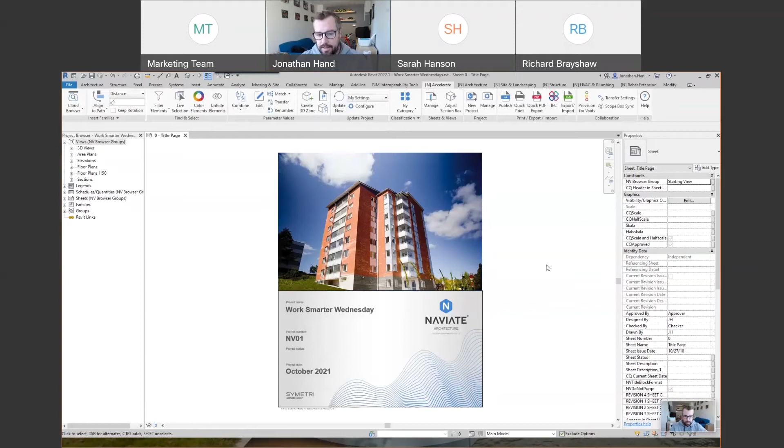Just some of the tools that will be really good for you to start saving time to check, update, and manipulate all that type of data. So you can see that in my Revit, I've already got the BIM Interoperability Tools, and I've got some COBie schedules and data already sitting within my project. So I'm going to sort of flavor everything I want to do around the COBie data, how we manipulate and manage that information.

You'll see on the Accelerate toolset at the top, it's split into different sections in the ribbon, but the one I'm going to focus on quite a lot today is around the parameters and the management of that data in these values. One of the biggest tools that everyone uses day to day when they subscribe to Naviate is the Edit Parameter tool. If I click it, it allows you to manipulate and manage that data, whether it be from a Revit category or from a schedule.

If I look at the category section first, this allows me to pick any category that's visible within the project. So here I can select something to do with the walls, and it will load a dialog box that allows me to choose the parameters I wish to review, modify, or edit. I can look at both instance and types. To show an example, I can click type parameters, select all parameters, select OK, and they will load into this dialog box, like an Excel type matrix.

This gives me flexibility and visibility of what that metadata currently looks like. It works very similar to Excel in that you can jump into a cell and manipulate it. I can select this cell, it will highlight, I can click delete, and select update values, and that writes that parameter change directly back into the Revit family and into the model. I can also double click into it and input data, make a change like that, put in a fire rating, and then click update values.

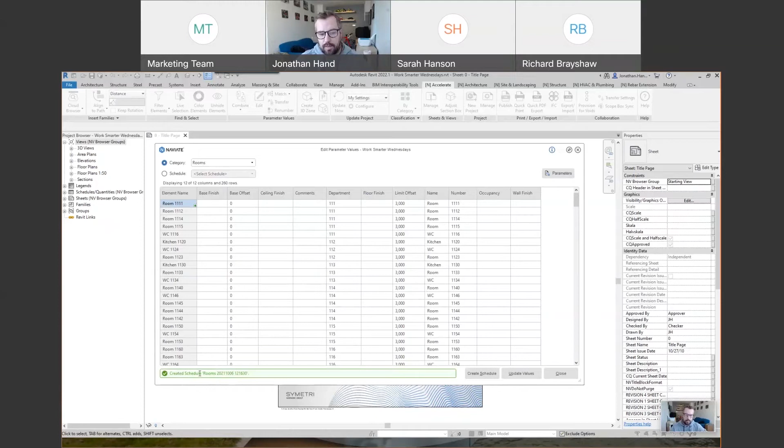Whereas here, I can just load them into the matrix, select OK, and you'll now see that my room schedule has been created. So when I check my project browser, schedules, you'll see under the question mark, there is my new schedule.

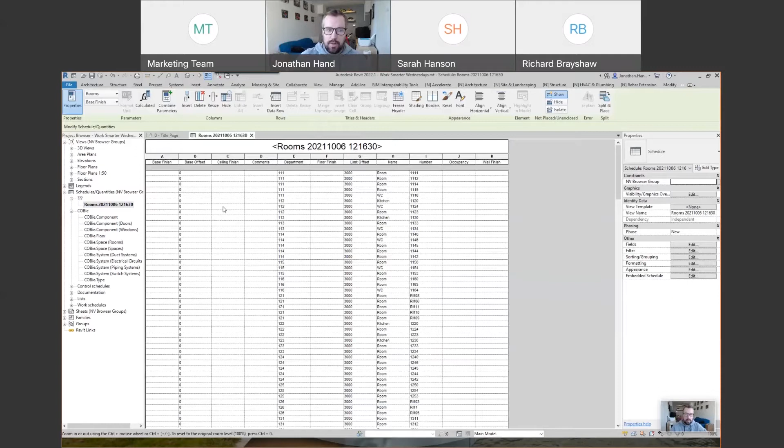So you've got full flexibility whether you're editing the parameters from the categories, editing the schedules, or whether you want to go vice versa and create a schedule from the parameters. Naviate can do all of those things, but that's the simplified version of modifying the parameters.

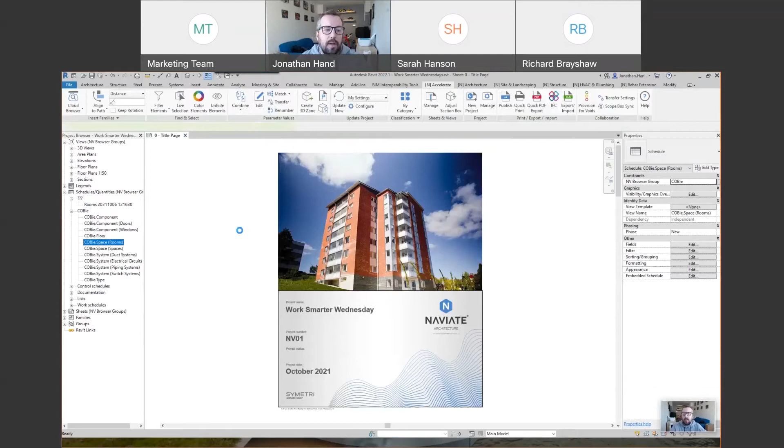What you'll find when you're looking at the COBie stuff is that lots of it will be empty. So if we look at, let's say, the standard room schedule, you will see there are just lots of gaps. So I've got the standard information which has been generated, and you can see there are some of my descriptions that I've put in.

But what I may want to look at is whether there's a way that Naviate could help populate the room tag information. Is there a way that we can take existing content, combine it together to create new parameters, and assign data automatically into these schedules? And the answer to that is yes.

So when we look at the editing button, to the left of that, we've got this feature called Combine. This allows you to take multiple parameters together and combine them, putting them in somewhere else. By clicking the Combine button, it allows me to start picking categories, and I could pick multiple categories if the parameters are common between the two.

To show you an instance of this, if we look at, let's say, the rooms, I can select the room category and then Naviate will load all the applicable parameters, whether instance or type. So if I select the instance, what I can now do is take existing parameters from the room, combine them, and populate them somewhere else automatically in my system.

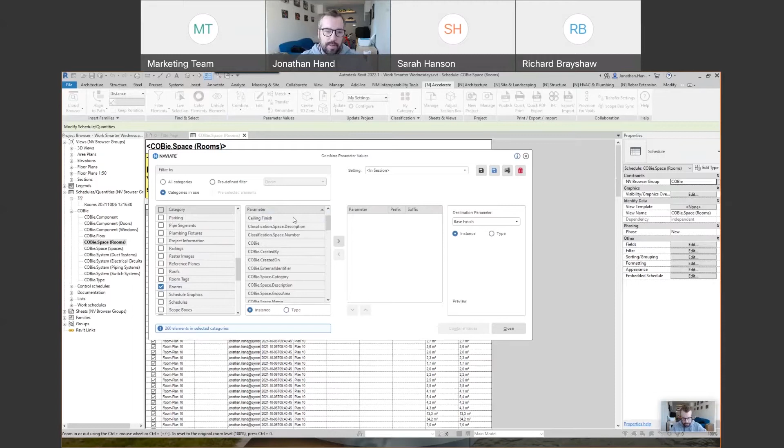So if we want to populate, let's say, the room tag, I may want to take, for instance, the room name. So I could take the room name and populate it in here, and let's say, for instance, I also want to take the level.

So this is now going to build a new parameter called name level. You've got the ability to put suffixes and prefixes in, so we may go with a suffix here, and it goes name dash level.

Then you can control where that information is going to end, so you can see the destination parameter. When we select the drop down, you can then select any of the applicable parameters. So what we want to do is probably put it into the space room tag.

What Naviate will now do is take the data that we've selected, format it as per the preview, and then automatically apply that across the board in the system. The ideal thing to do in Naviate is once you start seeing the save and save as buttons, we can save this into the project so it can always be automatically done.

So here I can go save as. I can just say space. Now I can give that any name. You may have your own naming conventions, but now this is saved in the system, and I could build lots of these things to happen and have them automatically run.

So we could just click the combine value button now, and what this will do is go through my complete project and take that data that I've set. You'll see straight away behind in the schedule, 260 elements have now been updated, combined automatically. So we can have that just run and it will combine that information.

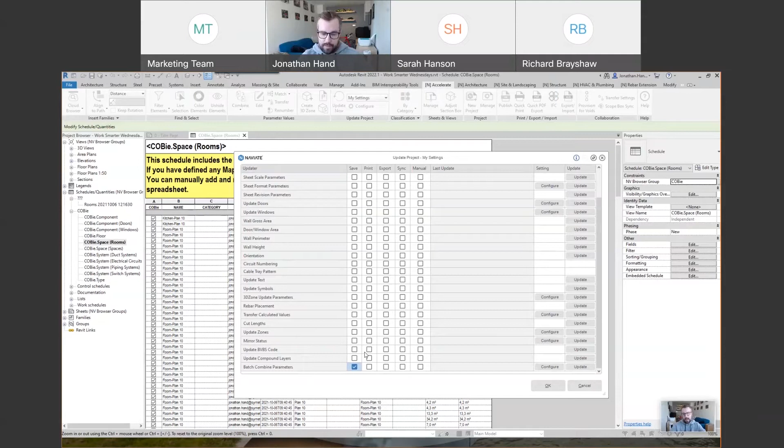If we scroll down, you will see we've got a batch combine. If we select this under saving, that means every time we save our project, Naviate will look at the combined routines and automate the population of that data.

So we can click OK. Now I can click save. Because we've set that routine to automatically run, it can just go off, save the project, and it will also then start to populate that batching combiner.

So in conjunction with the edit parameter tool, where we've got the ability to edit and manipulate data, then with the combine tool, we can move and shift data around the project. Then with batching, we can fully automate manipulation of moving that data however you like. So there are a couple of other tools in here that may be useful.

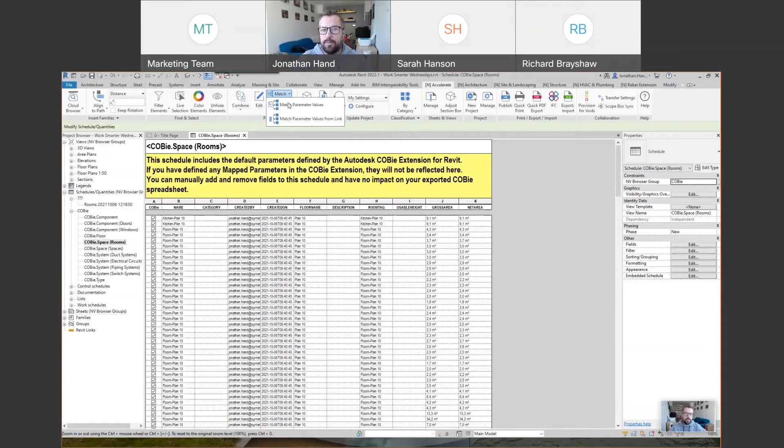We've got a match button, which allows you to match a parameter value. This can be quite useful just looking at existing data within your project, when you want to look at what something has within a particular family. So here we could select this particular window and have a look at its metadata.

We could add something a little bit strange into it, so we could go into its type and just put some information, like Naviate. What the match tool will do is allow me to lift that metadata from that family and apply it somewhere else within the project.

The matching tool also works on linked objects. So we can go to Accelerate and select the match. You can match it from an existing family, or match it from a value within a link. Here we may want to match the comments, the description, from that particular family, so we take the comments of the window.

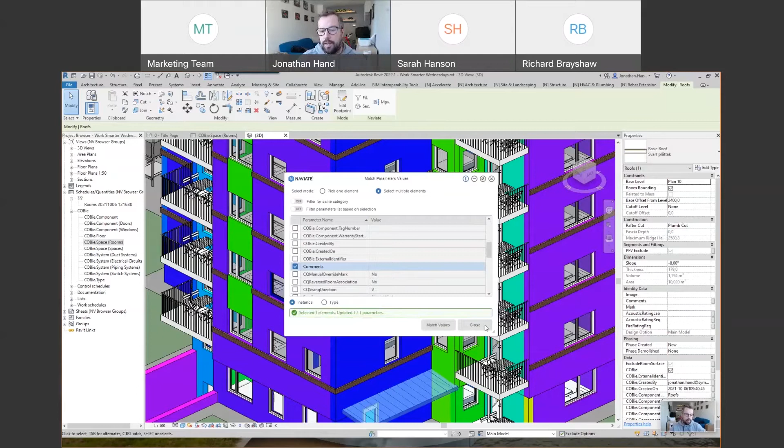I can click back into my model and select this roof. Click back in here and you can see now we can match the comments from the window, making that parameter value appear within the roof value. So now when we click into the roof, you will see we can match the comments across. It's just another advanced workflow you may be interested in.

That's how we can modify and edit the parameters. But you need to know where to look at times to see whether the data is inconsistent and where it's not correct. You may also want to start looking for some visual checks within your project, to see if the data from your supply chain gives this model the correct metadata. How are you finding it? How are you checking it?

This is where I use our color elements tool, as a consistency check. I can really quickly see, looking at a model or a view, whether the metadata is correct. Is there any values that are not quite right, or non-compliant, or values that are just empty, where they've missed that data and it doesn't exist?

The color element tool is designed to apply a graphic override to the view. Here you can see I've got a view with no color override, just the standard out of the box Revit color scheme. But Naviate allows you to select a wall category and then apply a color override to the view based upon the parameter you want to check.

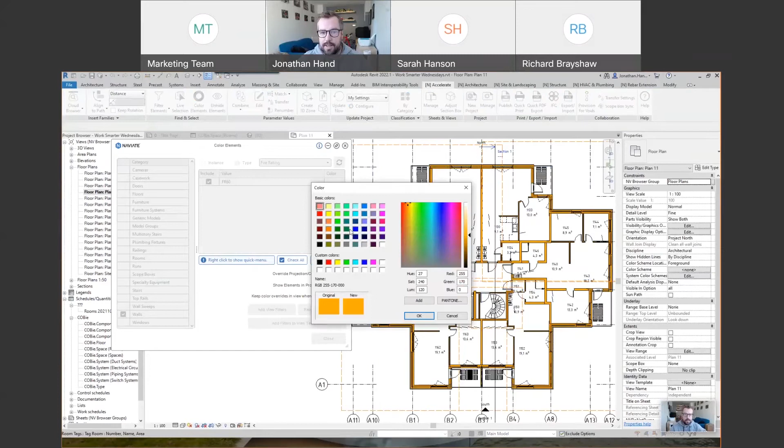This is nicely done if we were checking a fire rating, for instance. I can go to the type parameters, scroll down, and find fire rating, and it will quickly colorize all the walls based upon that fire rating. You can see it's telling me all the walls have a fire rating of 60, so it's colored them orange. Within this color scheme I can click the tile and give it a different color, select OK, and it will update and graphically override that view to suit it.

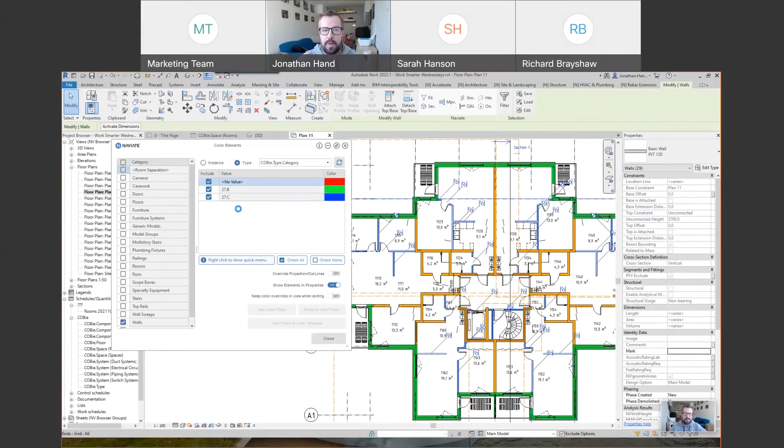When we click apply, we've physically made a change by just selecting it from the list. Now when I click refresh, you'll see that the color scheme has changed because there's a value I'm looking for within that type category within the COBie data which is non-compliant. Automatically, when the value is non-compliant, it goes red.

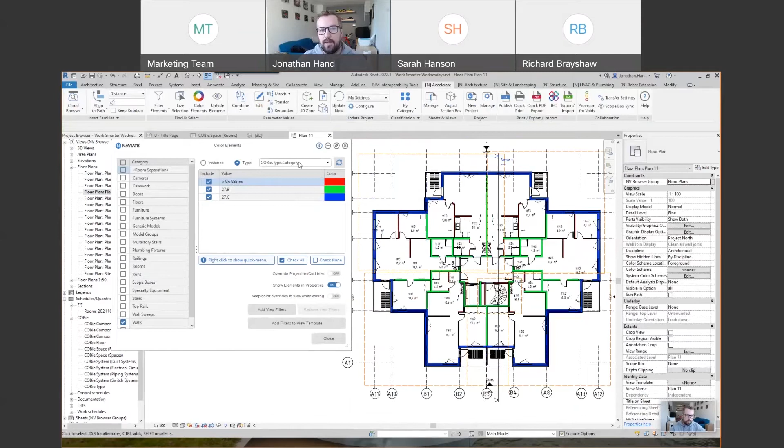So you can easily come in here and just look at a particular category, then look at the particular parameter, and Naviate will graphically override that to show you really quickly where there's inconsistent data. That's what we need to go back to our supply chain with to say there's nothing in here, you need to fix it. The color element just provides a really quick, easy interface to see within any view what may be non-compliant.

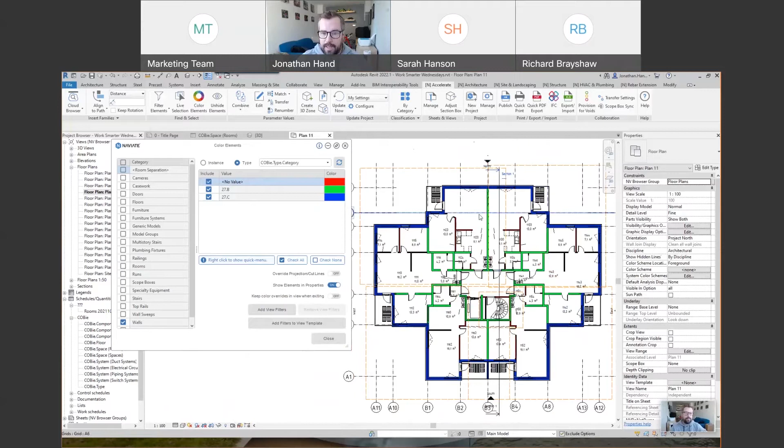It also works within 3D views. So if we click into this view, we can look at the color element tool again, and you'll see in this view there are some mad colors being used. That's because there's already a view filter in use, so I can just click remove.

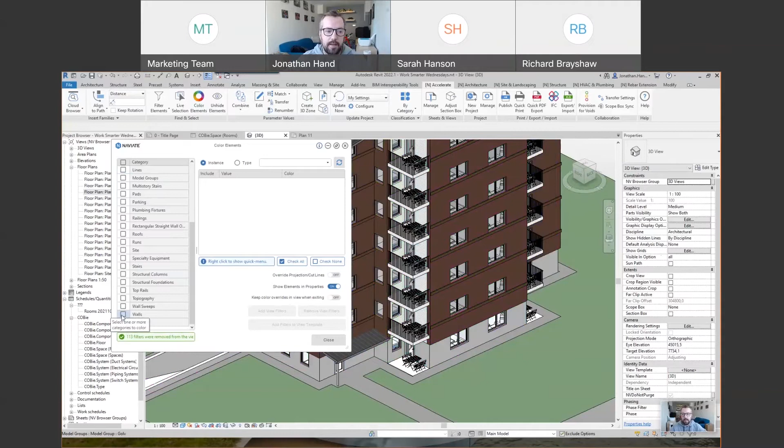We can go back to the standard view, and again I can click in, select the wall category, then choose a type parameter, look at some of the COBie parameters sitting in there, and it will build a color scheme reflective to suit my particular parameter.

So we can scroll down our list of parameters. We can look at, say, the area parameter - you can see everything's got a no value, so everything is going to appear red. What we really want to look for is something with different values. There's nothing in finish.

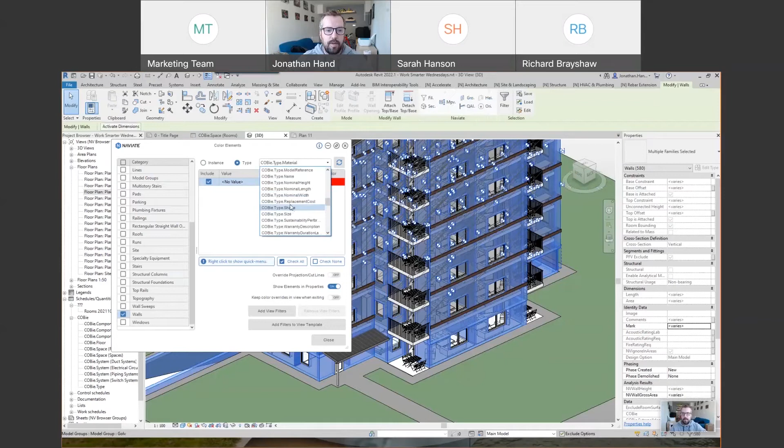Name - you can see it's populating a color scheme based upon all the different names of the walls. Now you may not want to do that, but it sometimes just provides a really good visual check to see what you're doing.

And then what you can do when you're building this - at the minute it's a color override, so we may want to go in and build a view filter. For those of you building view filters in Revit, it's not particularly hard to do - it probably takes one or two minutes to build one. Selecting this button, I can just create them in a matter of seconds.

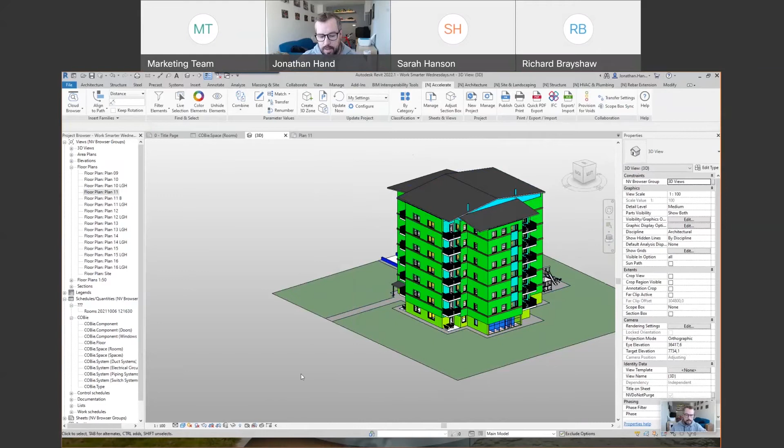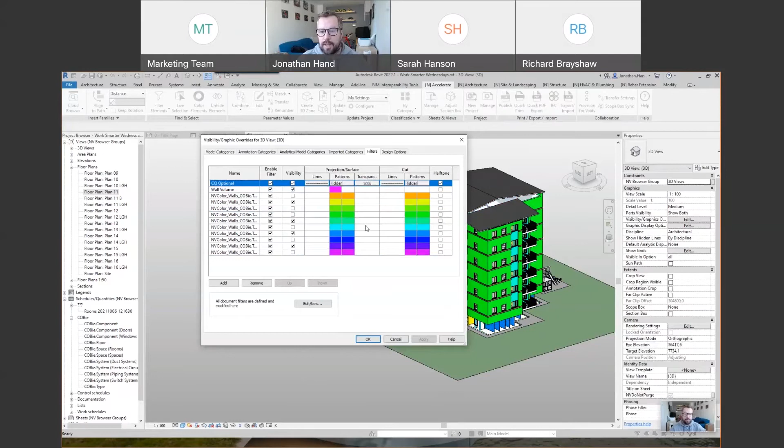Selecting close, then selecting visibility graphics, you'll see under the filters I've just built this new filter within my view. The new Revit functionality from the last couple of years means I can turn on and off visibility based on certain filters. Select apply - you can turn off this green wall, and you'll see we start to hide most of our product, but we're not hiding it off, it's just based on the filter.

So it's a really nice way to go through, find any inconsistent data just to check it, and a very quick visual graphic view to show you what's working and what's not working from the models that you're getting in.

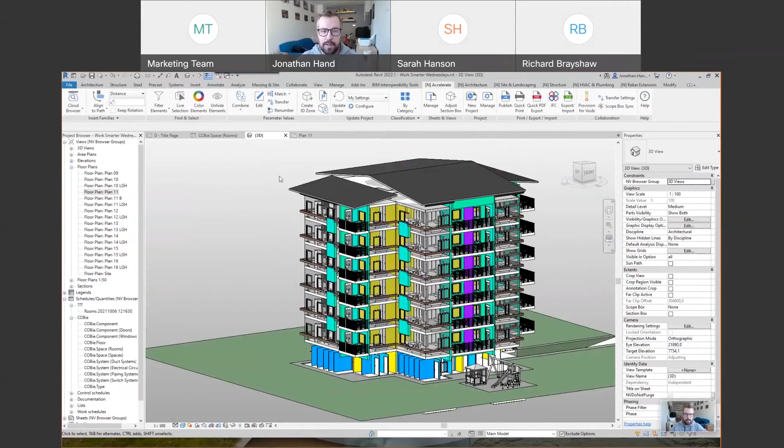You will also start to look at, when you get these models in from your supply chain, you may need to clean them up to federate them. You need to strip out some of the stuff they're doing, or maybe they're having to do this as well, just having an ability to strip out and clean up that project.

And we've got tools for that as well. You'll see under our project drop down, we've got a manage button. We've got a range of tools in here just to allow you to manage that project. The one I use nearly weekly is my project cleanup tool.

So if I need to supply a model, I need to strip it out - I don't want people seeing certain information with the views, the sheets, and all the other stuff that's not always required when you're federating or supplying this model out to other stakeholders. That's where we can use project cleanup.

Now when I click it, it will prompt me to save the project because I can make catastrophic changes to this project by stripping out and cleaning it all up. So I'm going to save it first - I've got my standard view, so I'm just going to save it.

You'll remember that because I'm saving, it's also going to do that batch combine update and update the parameter values in case there's been a change since my last save. So it will just slowly go through, quickly save the project, and then we can run the project cleanup tool.

So now when I select project cleanup, we get a series of radio buttons that allow us to toggle on and off the things we want to strip out of the file. Starting at the top, we get an option to save as, which is probably a really good thing to do. If you don't have this ticked on, it will strip out the current project. So I want to save as a copy, and I then want to specify a folder. I'm going right to my desktop, and I've got a new model called Naviate Clean.

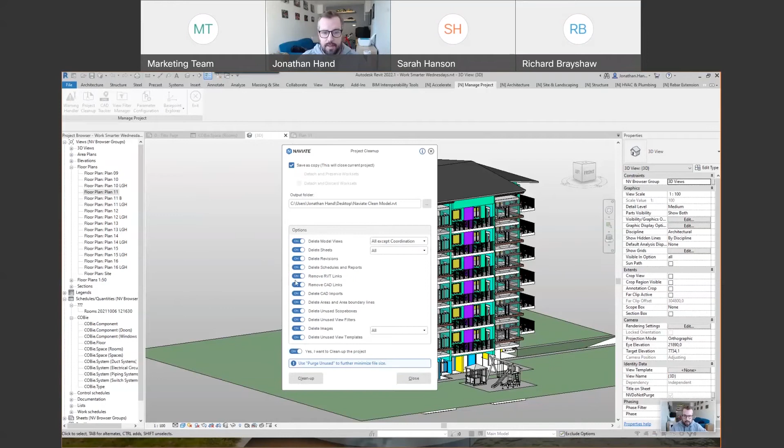Then you can go, okay, yes, I want to clean up. If you were to do this on its own, it might take you 45 minutes to an hour just to go through and look at that. But with Naviate, you simply go in, click Save As, select your options, and then select Cleanup, and it will just go off and automate that process. It will probably take about 30 seconds, just going through and stripping out all the options.

Now I'm taking everything out of my file, but you could go through and just do whatever you need. You can see it's now doing Save As, then stripping the file, and it's going to pop that Naviate, or that Revit project, out into that folder. So again, a nice way to look at that possibility of stripping the model out, because it's quite a time-consuming process. You may be getting a model in from your supply chain with everything in it, and you just want to work on a subset, a simplified model. This is the tool to run - you can see now, within about 30 seconds, that's saved and stripped off.

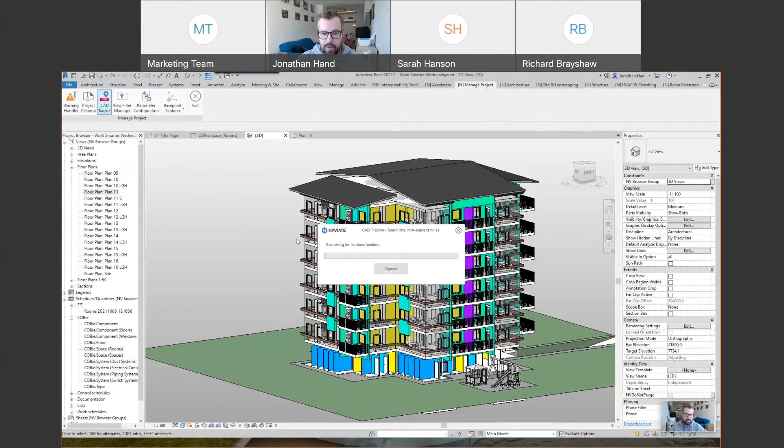There are other things in here where you can track the CAD files. If you're getting stuff through and just want to take out some of the CAD files, this lists where the DWG files may be, and you can simply turn them on and off within the views. If they're off and not in use, you can click delete and strip out that CAD file.

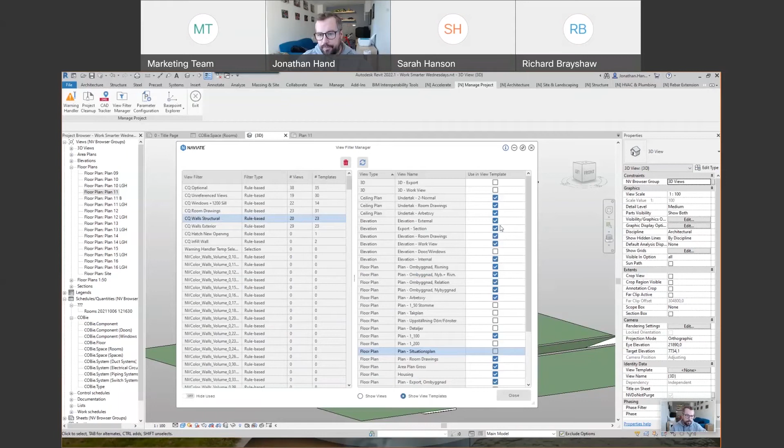There are other things for when you get a project through with millions of view filters applied to different views and you don't know whether stuff's visible or not. This view filter manager is a really simple way, based upon a simple matrix, to select the view filter name and it will tell you in which views that filter is in use. You'll see this wall structural filter is in use in 28 views and 23 templates, so I can just tick it off - that removes that view filter from use within that view, and it updates the list. You can tick it off your elevations too. It's a really simple way to scroll down your list, see where everything is in use, and you can switch it into view templates and tick it on and off. So there are some nice little things in there just to manage that project.

And then when we move it on, you've got the project, and you may need to start looking at whether there's a way to export the project out.

Do you need to create different file types from it? Do you need to go to Excel? Do you need to print it just as a PDF? We've got a range of tools under our print, export and import panel.

You'll see we've got a publish tool. Just to run you through some of the quick features of this, it's a tool which can automate publish routines, so you can set these up either yourself or within projects just to automate what you may need to print or export.

So we have the ability to go to print, whether that's physical paper or PDF, and you can create a configuration for printing. We can also export the project out to DWGs, IFCs, NWC, and we've also got the ability to go direct to PDF. Just to show you some of the functionality, if we look at the printing setup, we can click the cog.

This will then show me the configuration of how I can set up and export certain views and sheets out in my project. Here I can select a printer, whatever printer you may be using, whether you're going to PDF or not, and then choose what you want to print - all the sheets or views, a sheet set, sheet list, or whether you're driving it by a parameter. So here I could go with a sheet set.

I can export that out to a folder and combine this, so I'm going to print a series of plans out into separate files. You can also use the standard Revit naming convention, but you can also build in your own naming convention, which if you've got the parameters, you can align that to 19650 if you wish.

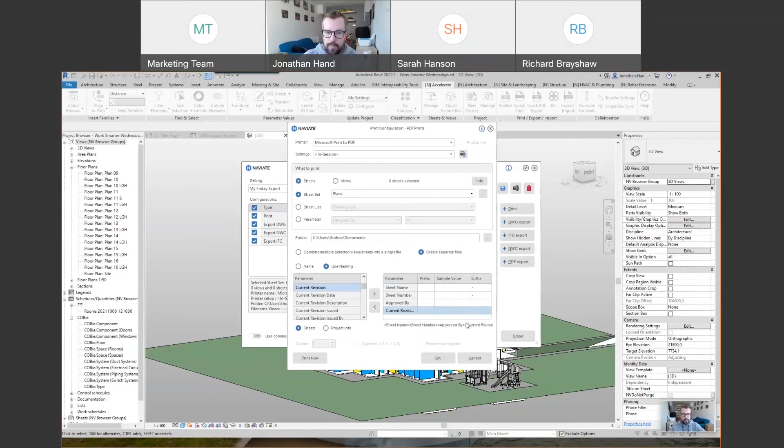It's just a matter of clicking the parameters, similar to what we looked at with the batch parameter routine. You select your parameters, build suffixes and prefixes into it, and you get a preview down the bottom. You build it the way you want the system to print, click OK, and it's saved here. Then you activate that when you publish, selecting the publish button. If the configurations are ticked on, Naviate will automatically go off and do all that publishing.

On the DWG side of things, if you wish to go out to DWGs, you can click sheet set again with a folder location and naming convention, and it takes the standard configuration settings from the Revit exporter out. So if you are aligning to the ISO standard, that will just align with that.

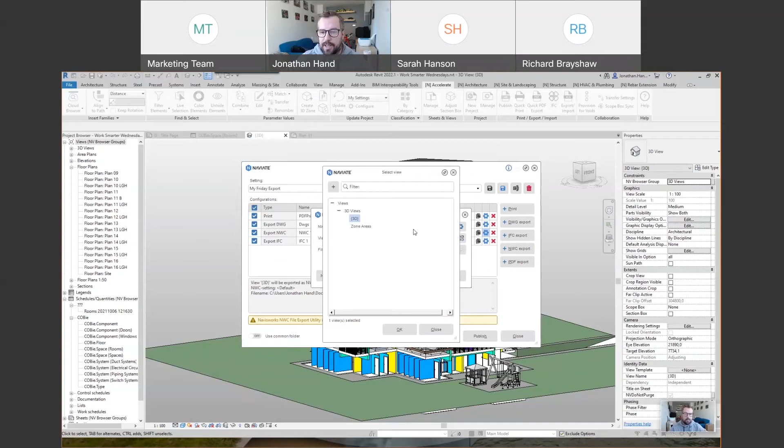We have the ability to do an NWC, so should you wish to create the export out to Navis, you can come in, select your views, click the zone areas, again specifying it to a location and to the Navisworks settings as well. You can configure that, clicking OK, and you're just building up these different configurations to sit within the project file, and when different stakeholders come in, you can just run them off.

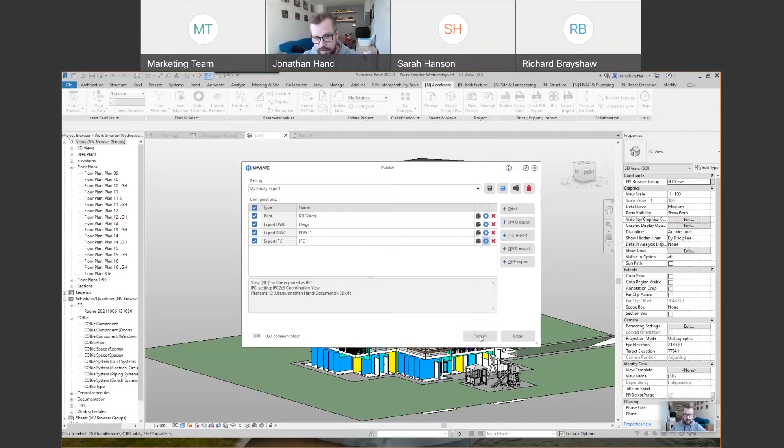It's the same with IFC, again building upon the standard Revit exports. You can select your view, select a location, and then simply click publish. What Naviate will do is go through each of these routines and do it all in one go, rather than doing 10 different PDF exports via Revit, then exporting to DWG, Navisworks, and IFC separately. This configuration can then be saved as a batch on my Friday export. I can come in, click publish, and it goes off and does everything out to your different configurations, and there's no limit to the amount of configurations you have.

Another nice thing is our quick print feature. Within Revit, you can only print one size sheet each time. So if we look at my plans, I've got various different plans, but selecting, say, 3 or 4 different plan sheets in the browser and selecting quick print allows me to fire them out to PDF automatically. The beauty of Naviate is it's got this little tick box, so it will actually lift the paper size from the title block definition. So if that's an A1, A2, or A3, it doesn't matter - it just does it all in one go.

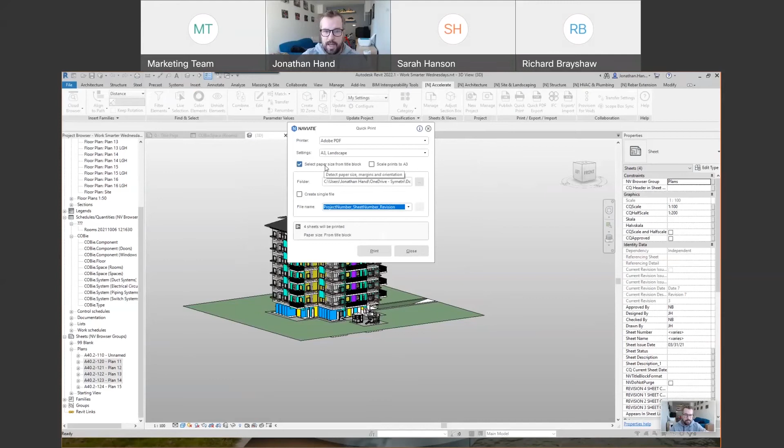Again, you specify it out to a folder, or you can create them as a single file, again with naming conventions should you wish. So if we want to do something like that, or you can use your own, where you can go in and build that naming parameter. You can see 4 sheets will be printed based on the title block sizes, just that extra time-saving piece to get that information.

You'll notice we've got some tools just looking at the IFC side of things. When we select the IFC button, it gives us a subset of extra tools that are in here. I'm not going to show you every one because it will take a bit more time, but if you do want to see more on IFC, just give myself or Richard a shout, we can do some one-to-one sessions on this. I want to take you to this tool — my favorite IFC tool within Naviate — the ability to start assigning that class by family.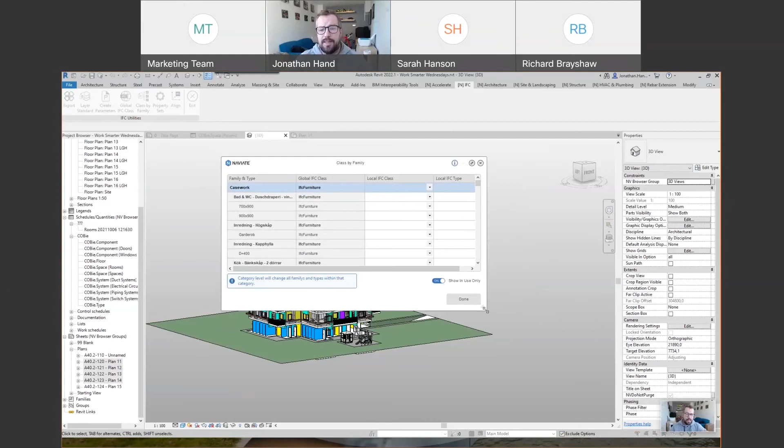When we select the tool, it loads a little dialog box. As a standard, Revit has classified everything based upon a global class. So when it's a piece of furniture, it tells it this is furniture, but we don't have any local classes or local types. What we can do in here, when we take the standard IFC for a slab or floor within Revit, it tends to just come out as floors — you don't really have any definition for its class or type.

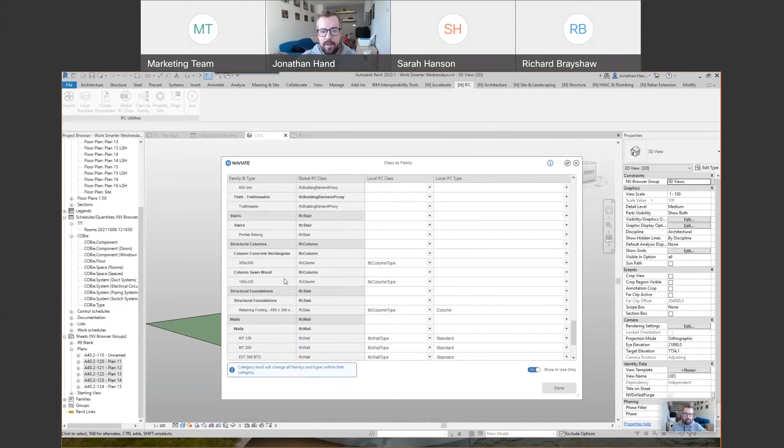But if we scroll down, we can find the different categories. If we look at some of the foundations, you can see I've got a retaining footing. So I can select the local class, select the drop down — now it's reading them class types. Here I could go and assign this to, let's say, the slab type. You'll see it will then assign that local class to the type in here, and we can drill down further and assign that data in again. So we know the local class is a slab, then what is the local type? Here we can define that extra level of information — this is going to be, for instance, a base slab.

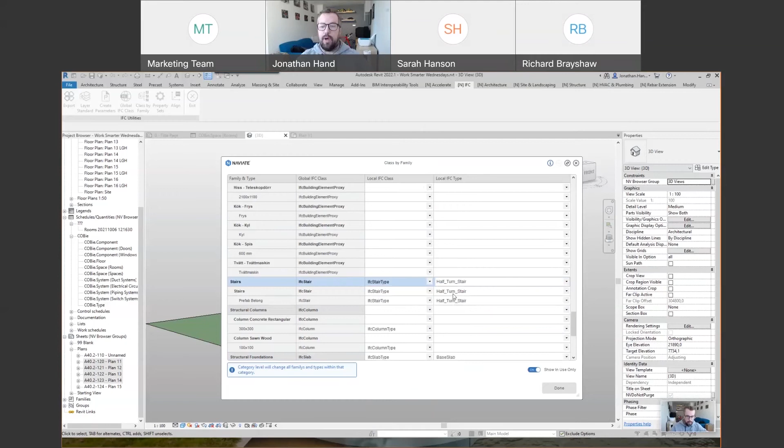You get the principle that you can assign the local class and then the local type, all based upon drop down. So if you find, let's say, the stairs, you can select well this is a stair type, select the drop down, and then define that further level of information. I'm not familiar with what the stair type is, so I'm going to say it's a half turn, and you can then select done to define that.

So when you go to export it, that information is embedded for the class and then each of the local types. I really do like that — a really quick way to go in and set it based upon what the family types are. It's a really nice feature in there.

The next tool I want to show you — although I've shown you how to edit parameters within Naviate — we can also fire everything out into Excel. Here we can just go to import export, and we can choose to export our schedules out. For instance, if we look at the COBie space, which is the one I've edited, I can export that out to Excel, just go export, and it will fire it straight out to an Excel file.

I select save, and it will launch Excel and show me that data directly fired out into Excel. You can see it's just taking a matter of seconds — there you have that information then fired directly out to Excel. But if we run it again, you can start to take everything out, so I could take every schedule here, select at the top level, and Naviate will go out and write this into one Excel file.

But we can also use the ability for re-import.

This is the really clever bit, that we can fire it out into Excel, make changes in Excel, and then import that back into Revit to update that parameter value.

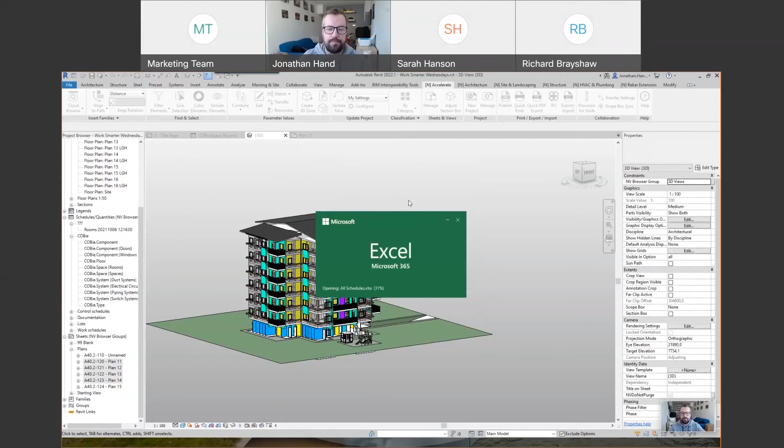Here we go. Because we're using this re-import method, as I said, you can go in and manipulate any of this data. So if we look at the component door schedule, under the description, we put Naviate in here and drag this down through all the cells. We drop that in there, making sure we don't miss any - we've put Naviate under the component description.

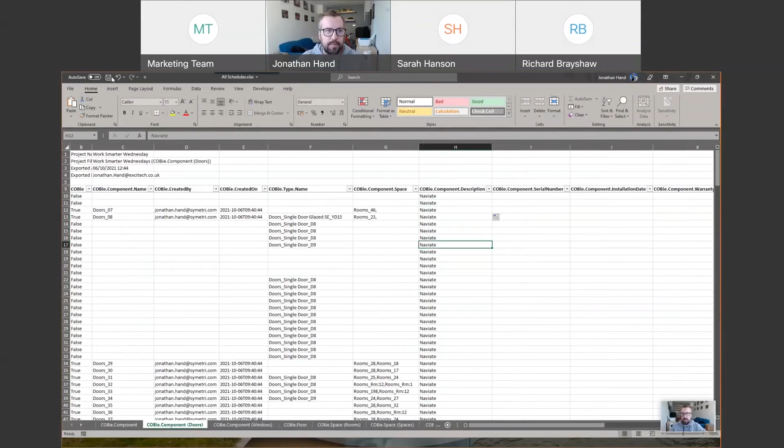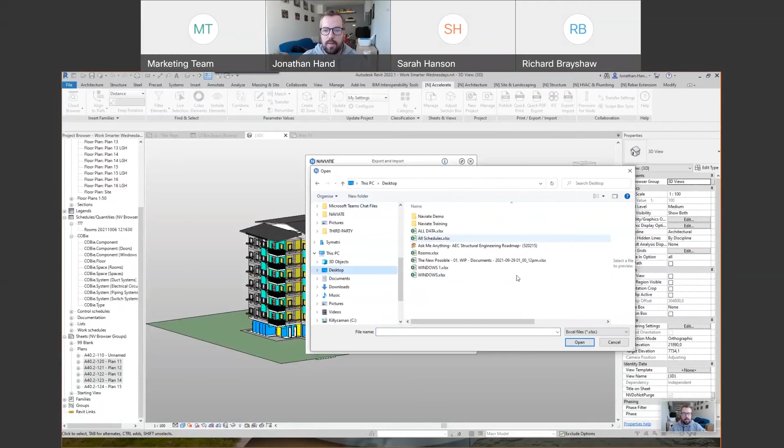We click save, we can close, and when we go to export import, we can then go through and look at that information. We can import it all, or select import and pick the file. We go to our desktop, click all schedules, then we can import it all again, or just pick the doors. We go import, and it will do a quick check to see what information is different between the two - it's resulted in no errors.

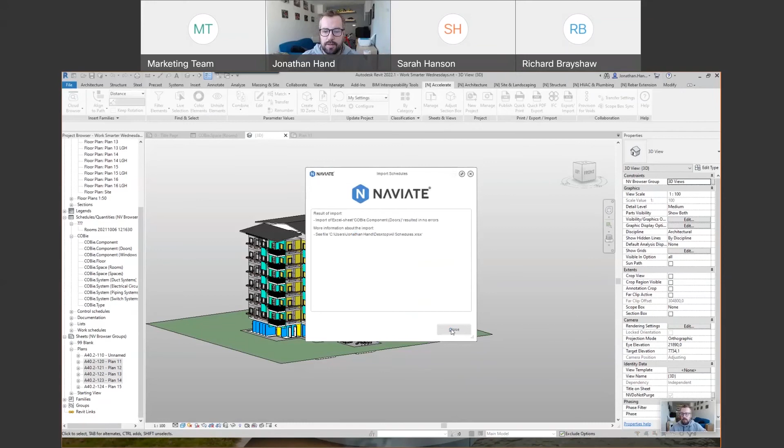We can then close, go in group, and then go look at that component door schedule, and it should have - provided I've selected the right schedule, I think I have - you can see there under the description, we now have Naviate populated.

So you've got both workflows. You can do it within Naviate to find the data, manipulate it, edit it, should you wish. Or fire it out into Excel, use the option to re-import, manipulate, change, edit the data there, and you can see it comes right back straight into my Revit environment.

So coming towards the end, the last point we wanted to cover is Builders Works openings. This is looking at what we call in the Naviate world a provision for a void - the ability to look at joining disciplines together. So let's take architectural and mechanical, with pipes and ducting going through walls. Can we provision that to have a system where we recognize where these clashes are happening, and get the architect to automatically put the openings in line with where I want them from a mechanical perspective?

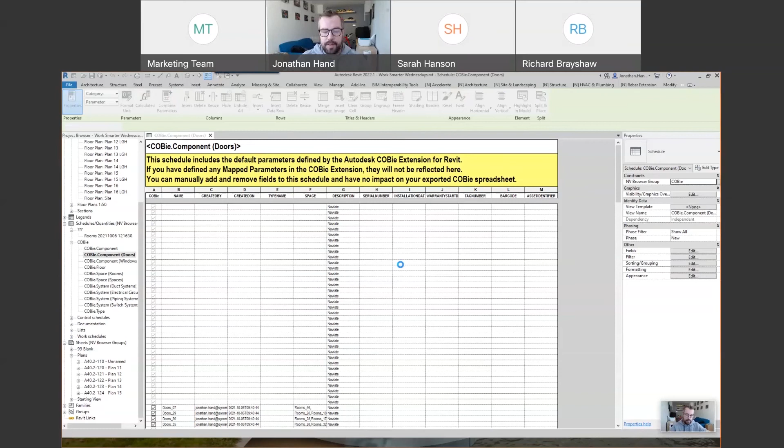I'm just going to open up a different model for this because I've got two different disciplines together, and I can show you very quickly the principle of what the Naviate system will do. So if we look at this MEP model, this is a piping model with some ducting and pipes. What we can do as the MEP contractor is build a provision in to mark an area.

There's a pipe going through a wall. This is the void or the opening that's needed. We can send that back to the architect and say, look, this is where you need to do all these things. Then you need to actually put your openings in the wall.

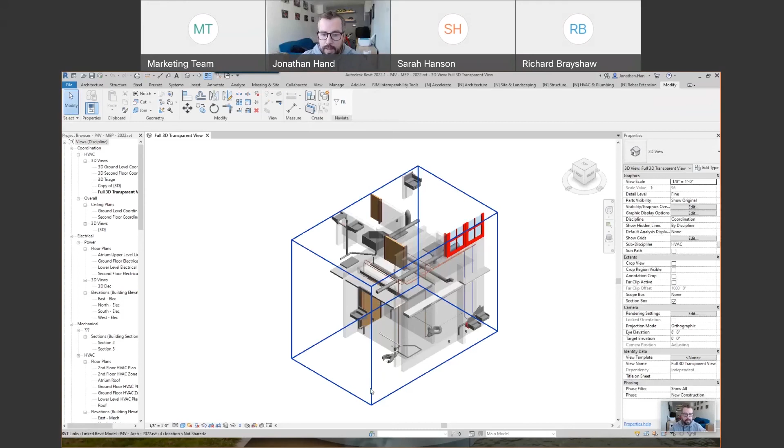Under the Accelerate tool set, we've got this provision for voids button. Now, this is quite a large tool set. As you can see, it goes into its own contextual ribbon, and you've got lots of different options. I'm not going to explain everything on this call, but I'm just going to run through the process.

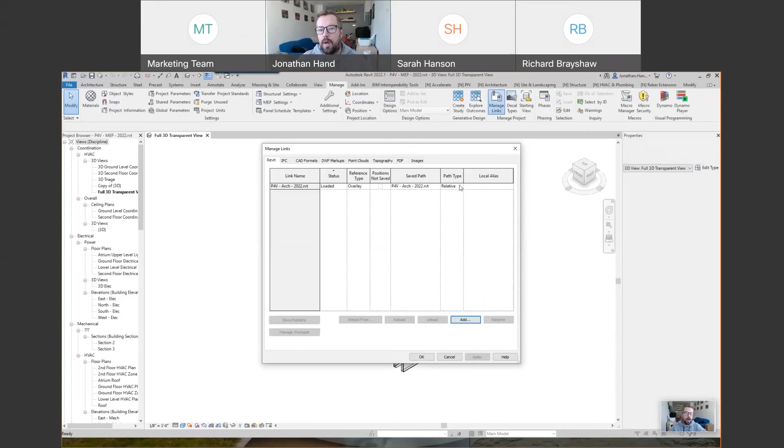What we want to do is, in this model, I've got the architectural model linked in. So I've got this from my architect, and I'm the mechanical services engineer, and I want to look at provisioning around these walls, what needs to happen.

So here I can go to provision for voids. I can set the architectural model as the target project. I can specify which discipline I want to provision. In this case, I'm going to look for both structural and architectural, but I could just limit it just to the architectural elements. But I can click both.

Grouping is just a parameter that we group the voids by, so I'm not going to spend much time on that, but we can look at what we're targeting. From a mechanical perspective, I want to look at everything going through all the architectural elements, so walls, floors, ceilings, roofs. And then the target, am I going to check it against my pipes, my ducting, my conduit, my cables? So very simply, I'm taking the architectural model, checking everything, looking for pipe intersections.

Here I've got a void system where I can look at intersecting, which is a physical intersection through a wall, let's say, or a proximity warning to look at a particular distance from an element. But let's go with an intersecting. I can simply click create. It will go through and do an analysis of the two linked files, and then it will create a provision for where a void potentially needs to be.

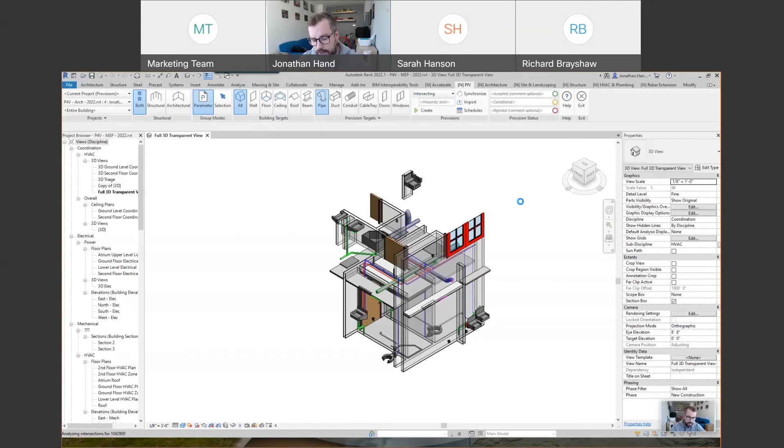Then me as the building services engineer can go through and look at each of these voids and decide whether they're applicable. And that's the bit that we can send back to the architect to say, we've put a void in this place. Are you sure that you need it to be?

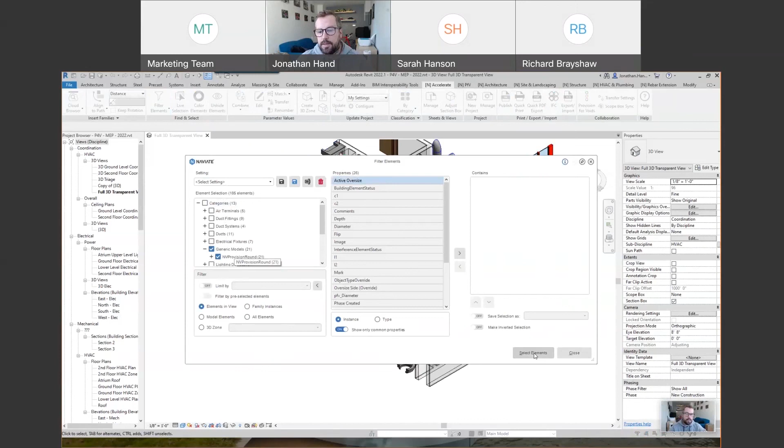So what Naviate has done is, if we look at Accelerate and we just filter that element, it creates what we call a generic model element. You will see it's created 21 of them, these provisions. And when we go in and look at them, you will see that we've got them through particular areas.

So if we zoom in here, you will see that we've got a pipe going through the wall. If we just go in and select this, this is the provision that Naviate has put in. It's just put a little generic model element that's found where the pipe goes through the wall.

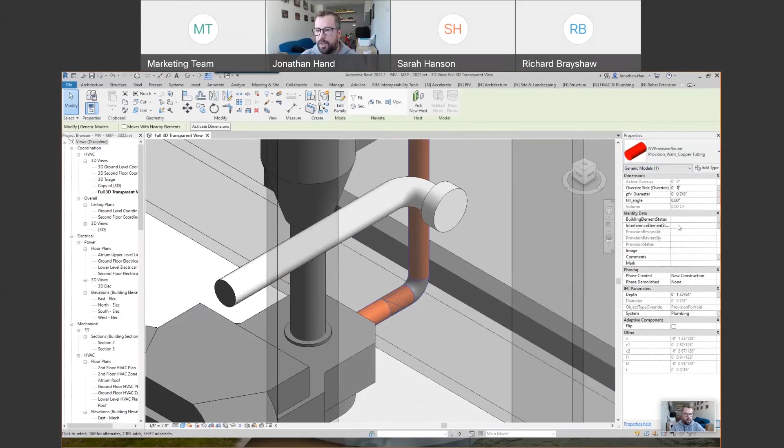You can see here that it then has some of these parameters. It's got an oversize, it's got a diameter and a tilt angle, which we can modify. So we could say, you know, I know this is in imperial, but we could say that we want a 1 inch, 25.4 millimeter provision around that pipe. So you can see there when we deselect it, it puts this little generic model element in here.

When we select it, we can go to provision for voids, and we've got a provision status. And you'll see here in the properties currently, it's blank.

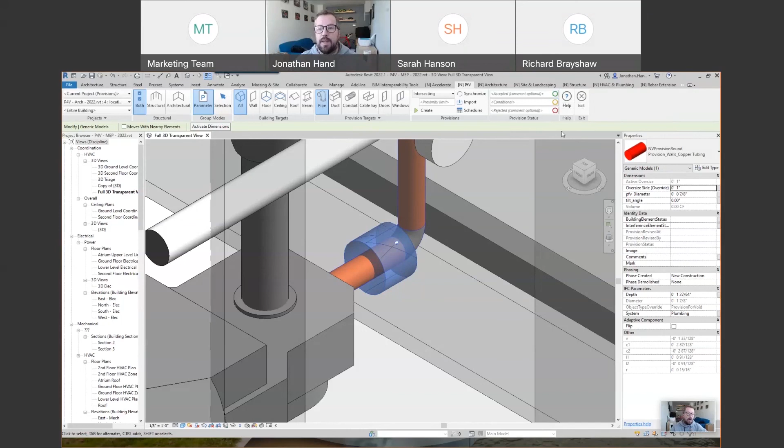So we've got 3 different types. We've got accepted, and this means that we accept the provision and we're going to create the void, which is in theory what we want to do. But we could also apply, we could accept it conditionally, but do not create the void. So we may send that back to the architect and say, look, we need to have a look at this, or we can reject it and say, look, it's not applicable.

But in this instance, what we could do is select all the elements and just generally say they're accepted. I'm not going to take you through the workflow of selecting each one individually, so I will just select them all. Then we select elements. Here I can then just provision them all together, and we can just go accept.

So that will then provide this accepted status on the provision. Now we can just save our model, so we've saved that, and we can now jump in and act as an architect on the flip side.

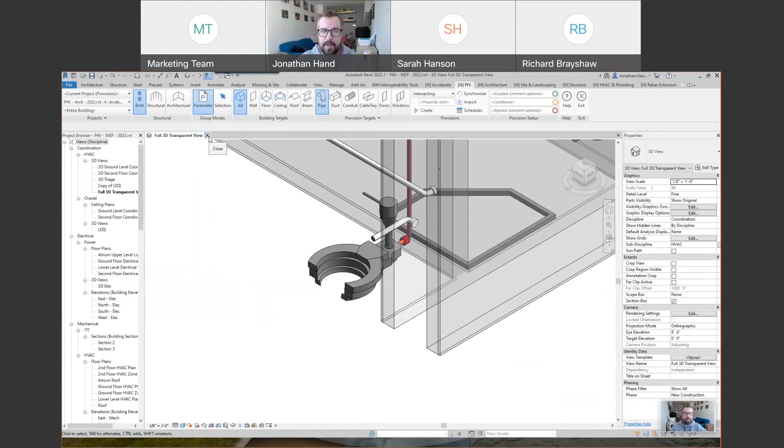So the mechanical engineer went through, provisioned all his voids, and put a status on them that I need to start looking at. Now I can go and look at my architectural project. I can link in the mechanical one, which will have the provisions assigned and the status accepted. Then I can go through, accept them into my model, and Naviate will go off and

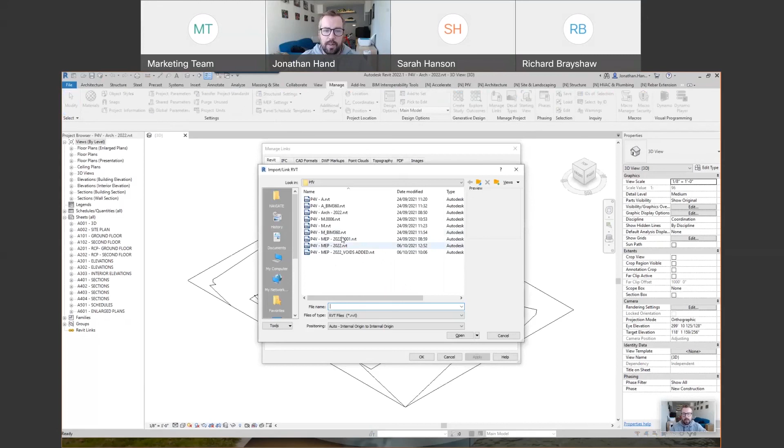provision them holes within the wall. So now when we go to manage, we will link the file in. Just go to add, and we will link in this file. I'm just linking it in, same coordinates, and this will obviously have the provisions within that file. So we let it link in.

That is that there, and then we can run the provision for voids tool. So again, we click in provision for voids. We want to provision the project mechanical. Again, we just click the import button because the voids are created, we just need to load them into our project. We'll go through and it will just build, take the acceptance from the mechanical file. Provisions will then get replicated in here.

We've got options to synchronize and all this, sort of advanced workflows for how you may work several different iterations and changes within the project. But in essence, what it's doing now is looking at the mechanical file, looking at where the building services or mechanical engineer has accepted and assigned an accepted status to them provisions. That's now just building them into my architectural file with the parameters and the changes and any of the oversizing or the tilting of them provisions.

And then we'll analyze them into my model. So you'll see down in the status bar, it's just analyzing the intersections, bringing them all through. Hopefully in a second or two, we can then go through and have a little look at some of these provisions. Just give it a second. Always a little bit slower when you're doing it live.

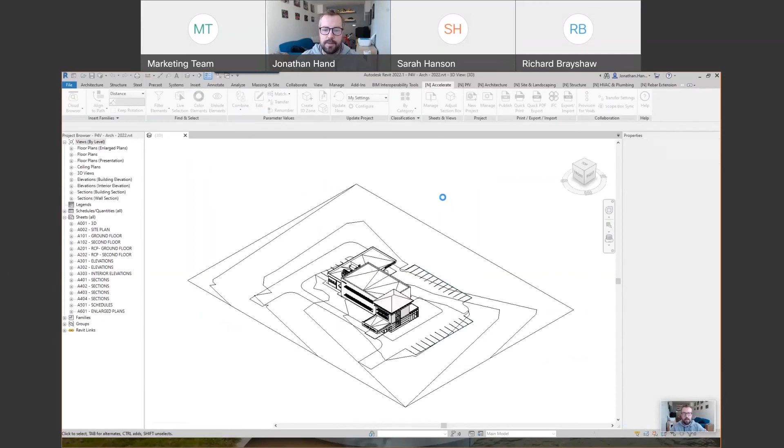Click close. Again, we can run the accelerate and filter tool. Because this is quite a busy view, I'm just going to look at my generic model elements. We can look at just some of the round stuff, or you could drill it down. So just take these PVC wall ones. We can select elements, a quite easy way just to box it. Then have a little look and see.

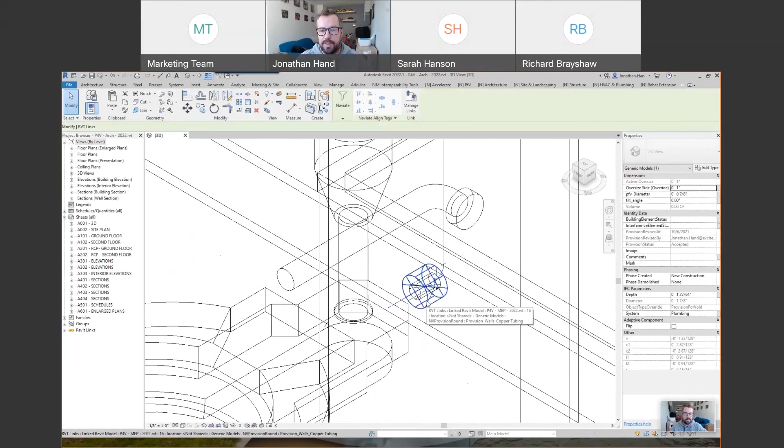Boxed in here, and we could just go, to make it easier, go to wireframe. You will start to see there is that provision that is there. We can go through and select it. You will see there's the provision that's been accepted.

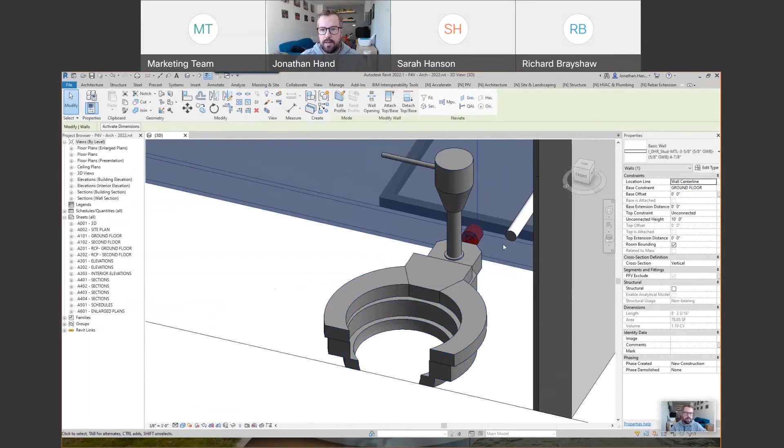If we just run through on our provision for voids, we just accept that into our model. You will now see that that is now there. And if we just isolate that object, we have a quick look at it. Spin that here, you will see there is your provision that has come through. Just make sure I select it. You see there's the provision that has then come through.

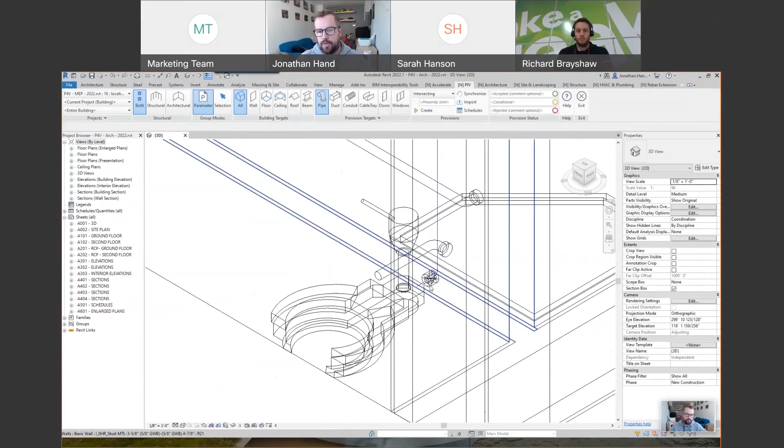So you're sort of starting to see that workflow, is that we can, as a mechanical engineer, take it through. The provision then comes through, and it will cut and void out all these places we want. You can see they're all in here, they're all linked across, and then we can manipulate and follow that journey as well. And again, similar to the IFC tools, this is quite a large tool set and lots of intricate workflows that can be there when doing it.